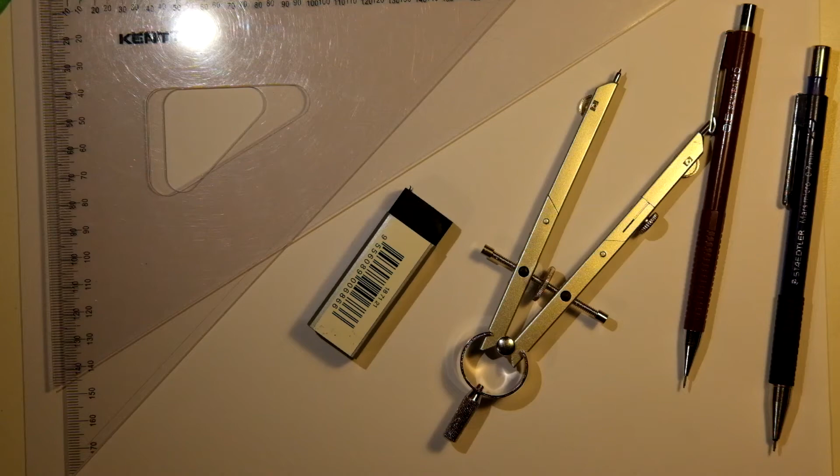This video is going to demonstrate how to produce a two-view sectioned orthographic drawing from an isometric starter. This is to simulate how a drawing might be in a HSC Engineering Studies exam.

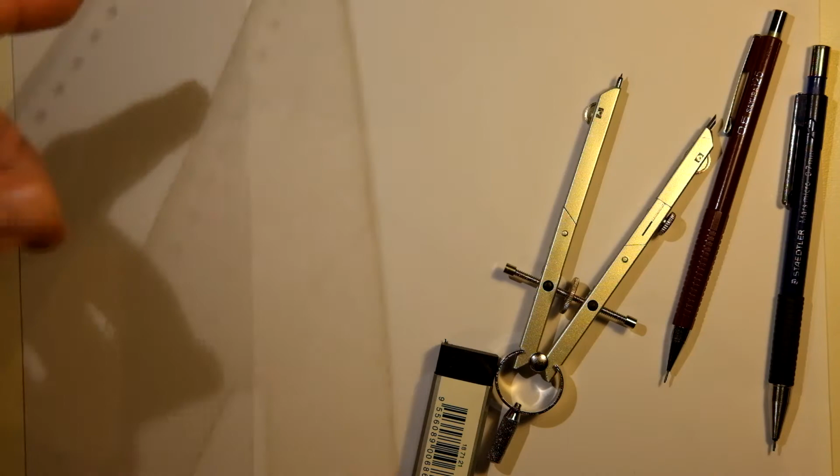Okay, the equipment I'm going to use: a couple of set squares, although for this drawing you could pretty much get away with just the 45-degree set square. I've got a couple of mechanical pencils, a 0.5 and a 0.7 millimeter, although you really only need the 0.5. Compass with a nice sharp lead and an eraser.

Alright, since we don't have a drawing board and T-square in the exam, I'm going to start by drawing myself a baseline that I'm going to use as a reference for all my horizontal and vertical lines in the drawing. That should be a nice light construction line. And I'll start by doing a vertical line at the right hand side of the page, which will be where I'm going to start drawing the front view of this object.

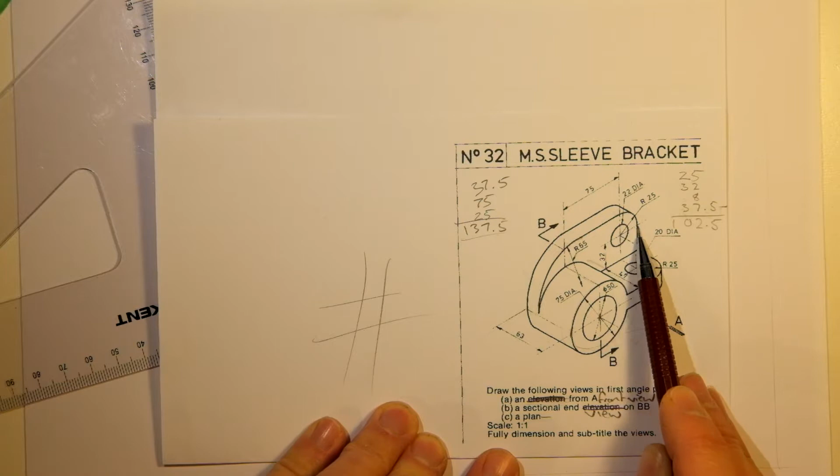Okay, so the task requires us to do the front view and a sectioned left end view. Let's work out the height and width of this object before we begin. So the width. Easily you can see the 75 millimeters here. You can see a 25 millimeter radius here, which means 25 from there to there. And we can see that this circular feature here is 75 millimeters in diameter, so that would be 37.5 millimeters from this center line. By the way, this center line continues through the center of the circle there. So 37.5 from there to the outer edge. So we've got our 37.5 plus the 75 plus the 25 gives us 137.5.

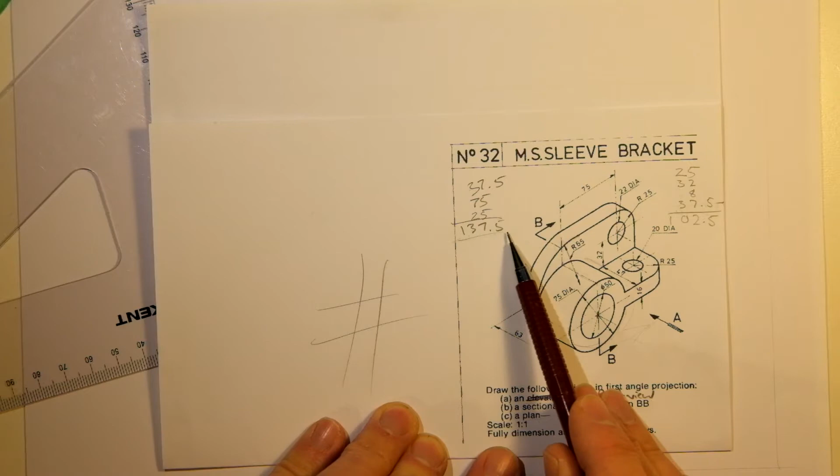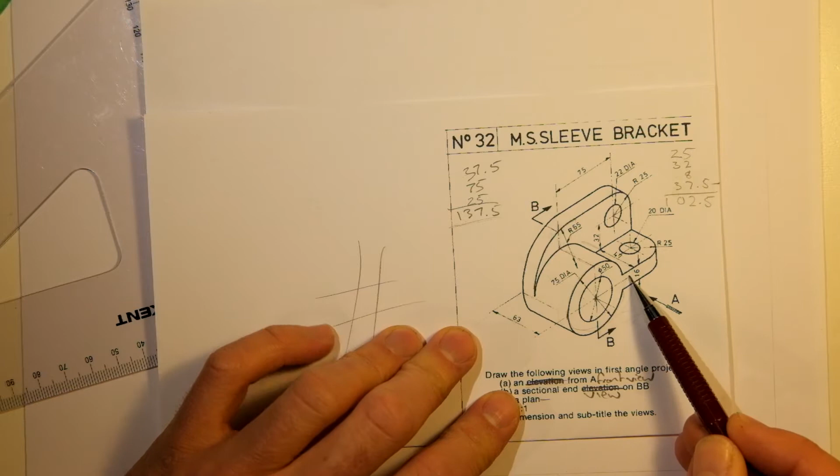So the height. We have this 25 millimeter radius, so from there to there is 25. From there to the top surface here you can see 32. This flange is 16 millimeters thick around that center line, so I'll add another 8 millimeters to that to bring us down to the center line. And then again we're going to use half of the diameter of this circular feature, 37.5 from there down to the bottom. 25, 32, 8 plus 37.5 gives us 102.5.

Right, so 137.5 I'm going to measure from that starting point on the right hand side. Place a mark on that measurement over here, and then use that to put in a vertical line. Now the height, 102.5. I'm going to measure that at 2 points up from the baseline, rather than relying on the 90 degrees from the set square, just to help reduce cumulative error a little bit. So I'm going to project that line all the way across the page because we'll need it over here when we do the left end view.

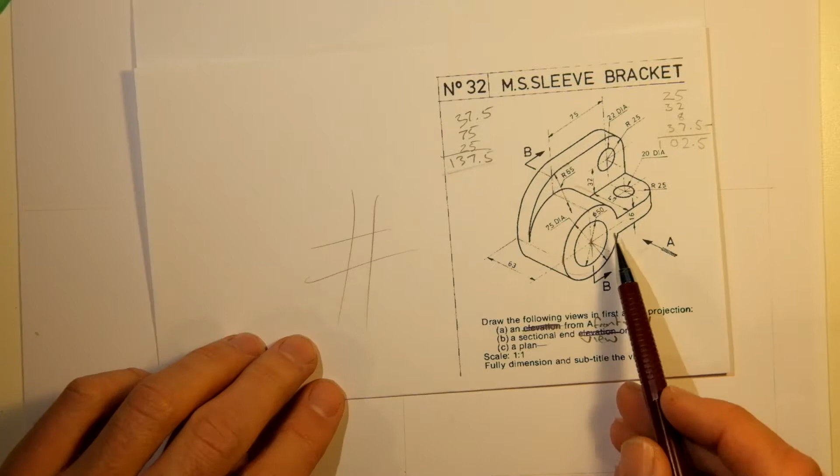Okay, so we're going to start by putting in this large circular feature here. It's a 75 millimeter diameter, so set your compass to half of that diameter, so that would be 37.5 millimeters. Got my compass set to the right size. So now to position the center of that circle, I'm going to take that radius and lay it out on the horizontal and the vertical sides of the rectangle. Then from those points, I'm going to scribe a couple of arcs vertically and horizontally. So that should give me the center of that circle. So now I'll draw that circle in. Just draw it in lightly for the moment because we might need to add something or change something.

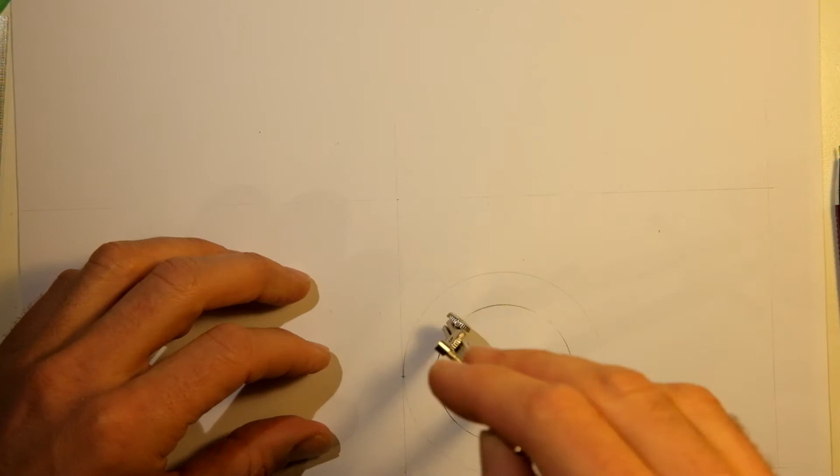Now the next circular feature here is 50 millimeters in diameter, so I will set my compass to 25 millimeter radius. Now this circle I'm going to draw in full weight right from the beginning because I can tell by looking at the drawing that I won't need to add or remove any sections of it. That circle is going to be a complete circle in the final view. Okay.

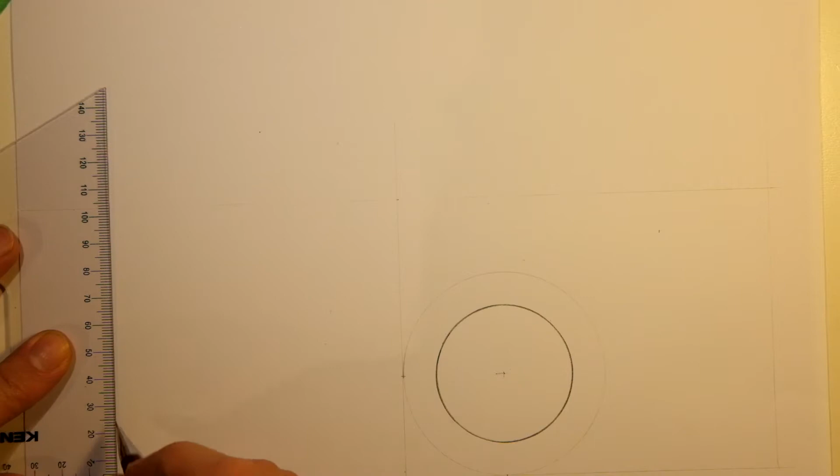So next thing I'll do, don't mind the baby noise, is a horizontal center line all the way through that part and all the way through the other view. So I'm going to again do a 37.5mm mark up from the baseline, and I will project that line right through. Now at some point this will have to be drawn as a dashed center line, but for now that'll do.

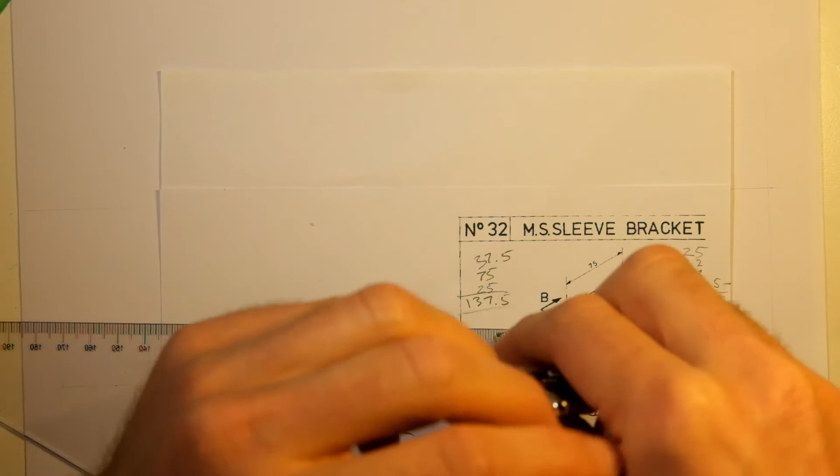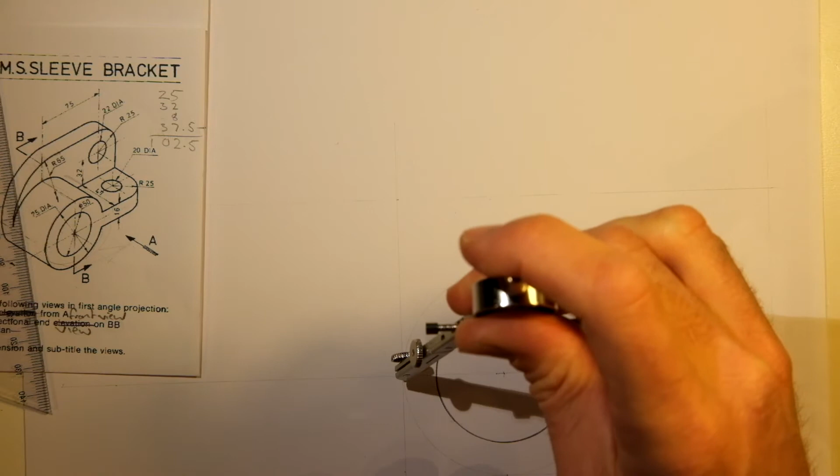Right, the next thing I'm going to draw in will be this arc here, this 65mm radius arc that's the top left corner of this part. So I'll set the compass to 65mm. Right. Now I can measure along this center line that I've just drawn, put a little mark there, and that is the starting point for that arc. And this is a way to check yourself, because the end of this arc should form a tangent to that top edge of the rectangle. If it doesn't, you've been inaccurate somewhere.

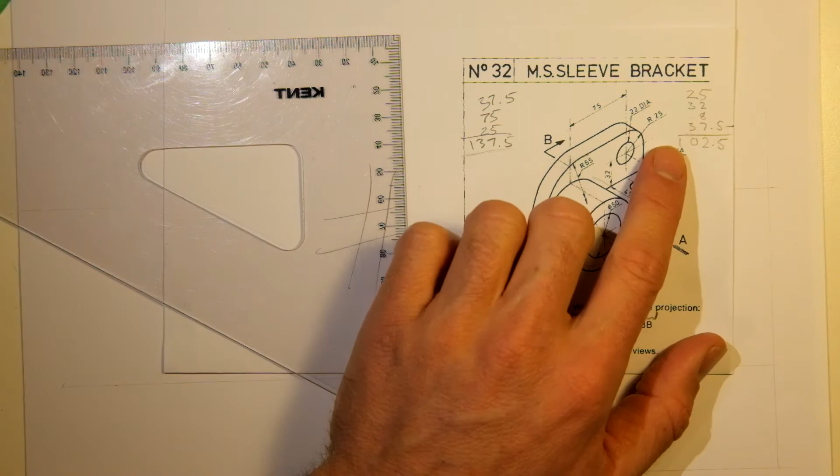Alright, so let's do the arc over in this top right hand corner now. As you can see, that's a 25mm radius, and conveniently that 25mm radius is concentric with this circle, which means once we locate the center of that, we've located that center for two features. So grab that 25mm radius.

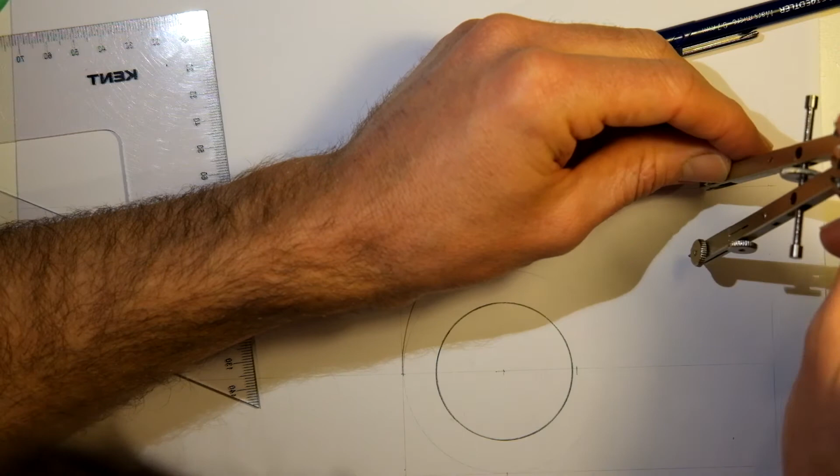And do the same thing again to find the center. I will make a little mark on the horizontal and vertical sides of the rectangle, and then from those points draw two new arcs, and at the point where those arcs intersect I will draw in the arc in the top corner.

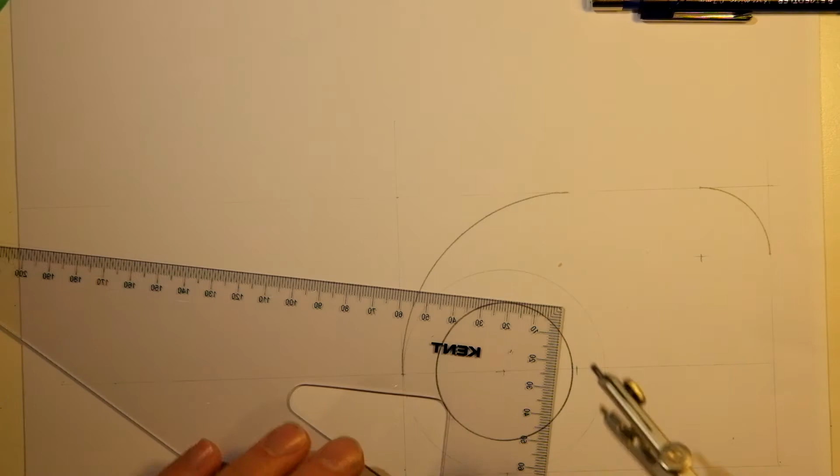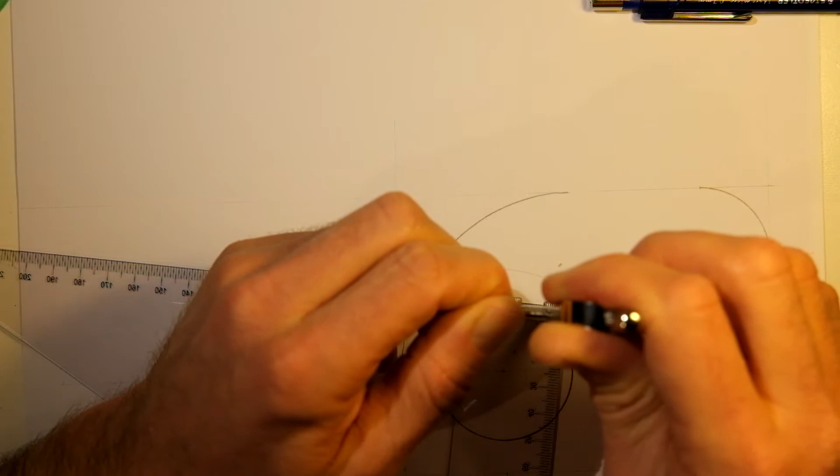While we're at it, I may as well draw the circle. It's a 22mm diameter. So I'll set the radius of my compass to 11mm. Draw that in. Okay.

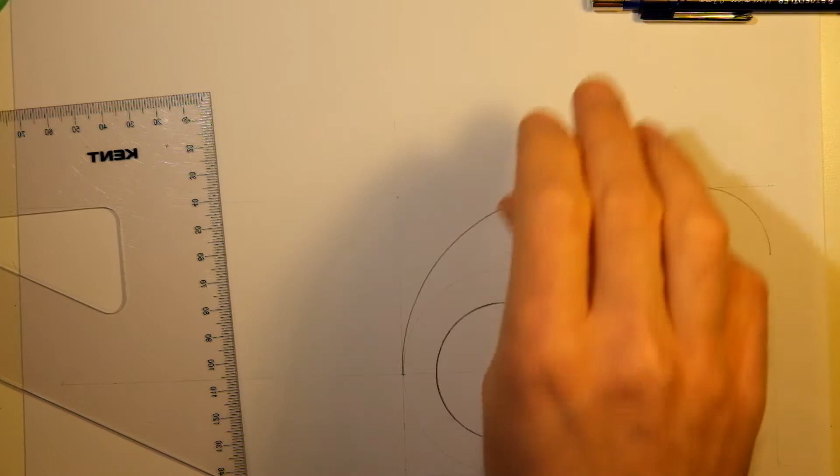Now we'll draw in the upper and lower surfaces, or the edges, of that horizontal flange. You can see it's 16mm high, so 8mm above and below that center line. And I'll do the same thing over the left hand side of the page, because we'll probably use that later. Light lines.

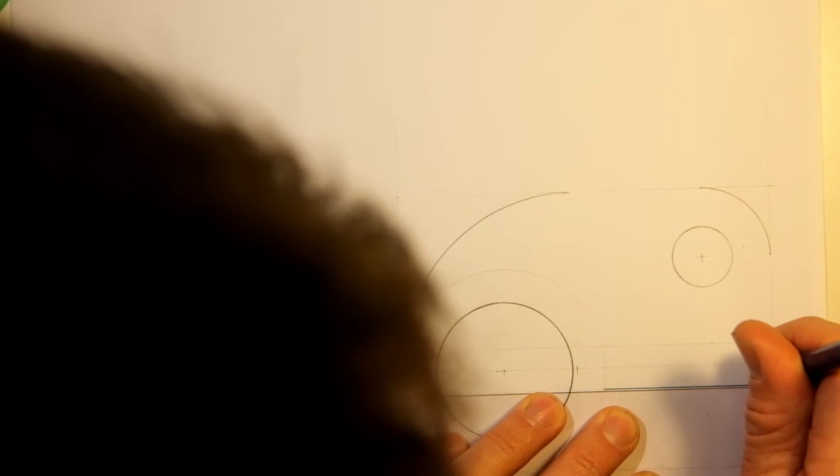Alright. So now we know that those will be full weight lines from the edge of that 75mm circle all the way across to the right hand side of the rectangle that we drew at the beginning. Now that's basically that view mostly complete. I'm just going to firm in a few of the remaining lines, darken them up a bit.

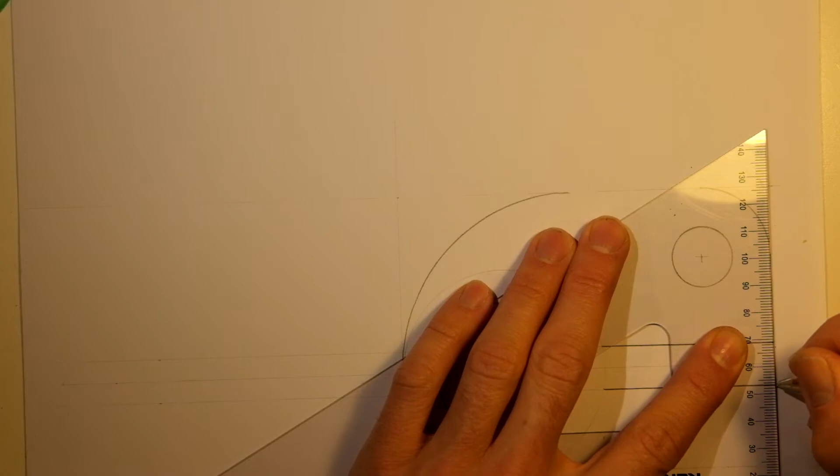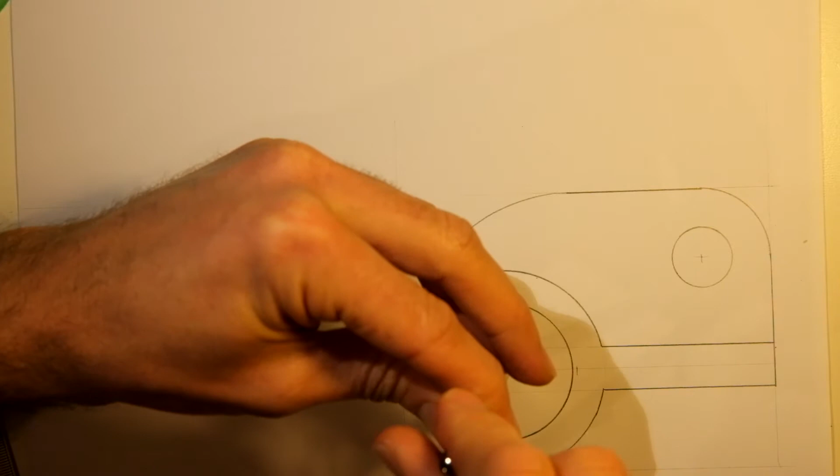Now I'll come back and finish off this 75mm circle. Now the only other things that we need to do on this view, we need to draw the hidden detail to represent this hole that goes through that part, or through that horizontal flange, and we can see that's a 20mm diameter, and conveniently its center is also 25mm from the edge.

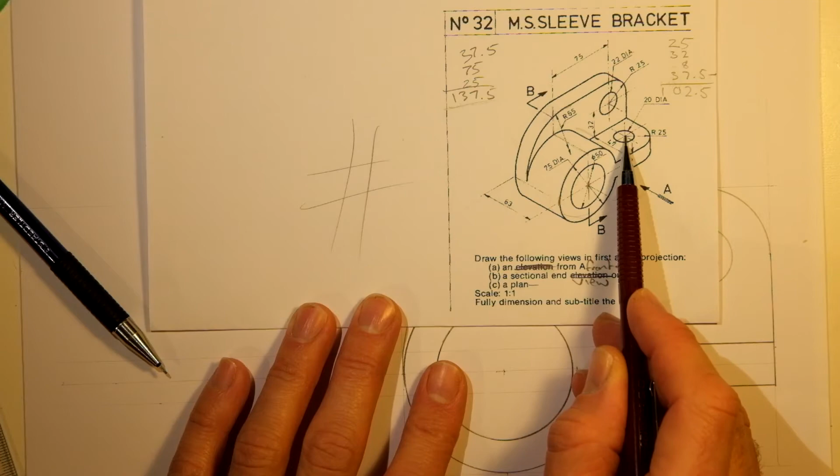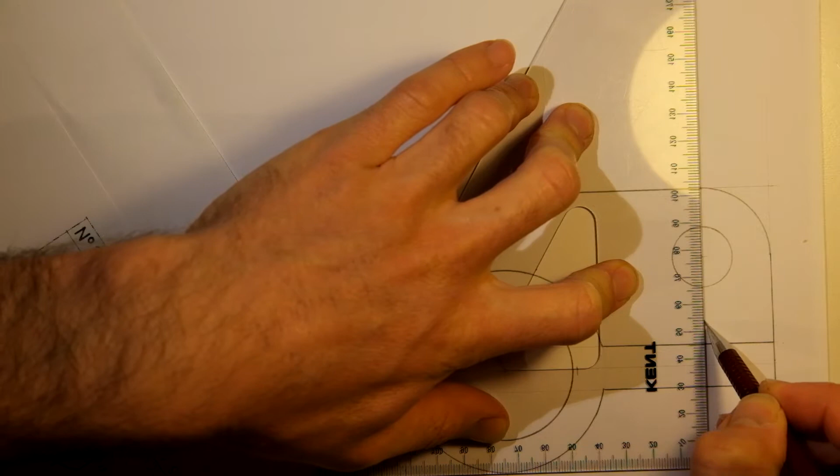So may as well draw a center line at the same time. So I'll strike a vertical line through the center of that circle that we drew before. May as well draw a proper dashed center line, long and short dashes through that circular part and continue it down to the bottom, through the flange, a little bit past, that'll do.

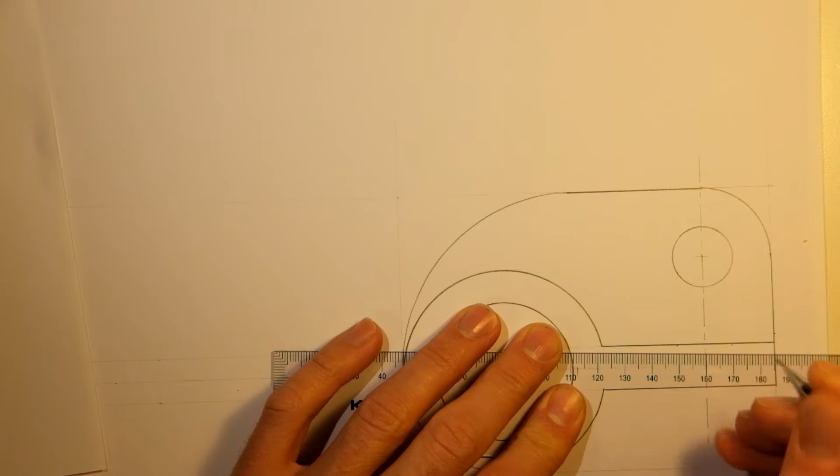Now, as we said, the hole was a 20mm diameter. So I'm just going to measure out 10mm either side, and then I can throw in those two little vertical lines. And remember, hidden detail lines are short dashes.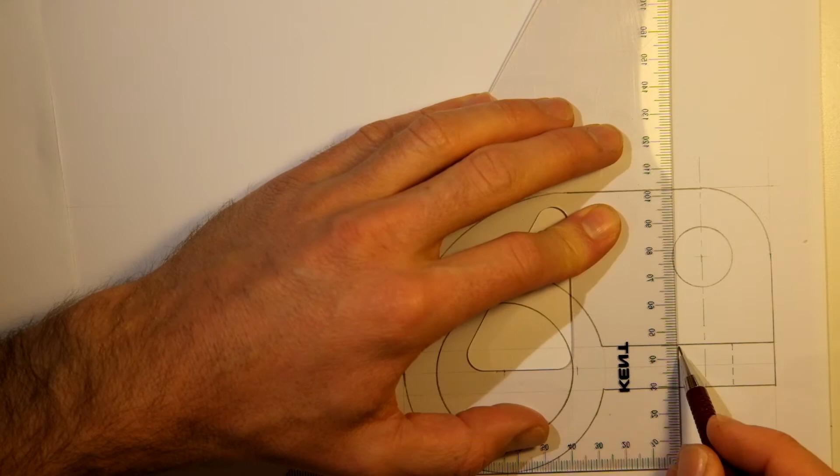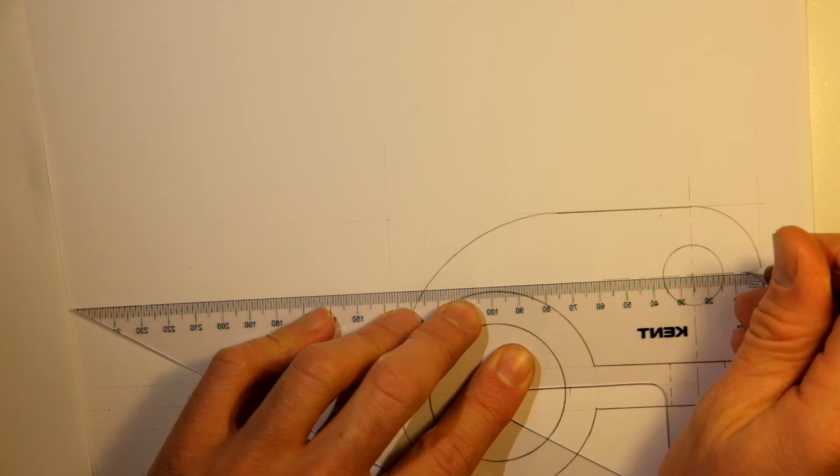Right, since we're in a center line kind of mood, I will put in a horizontal center line through this circle here. And through this circle. Alright, I'll leave that view as it is for now, and we'll start doing the left end view.

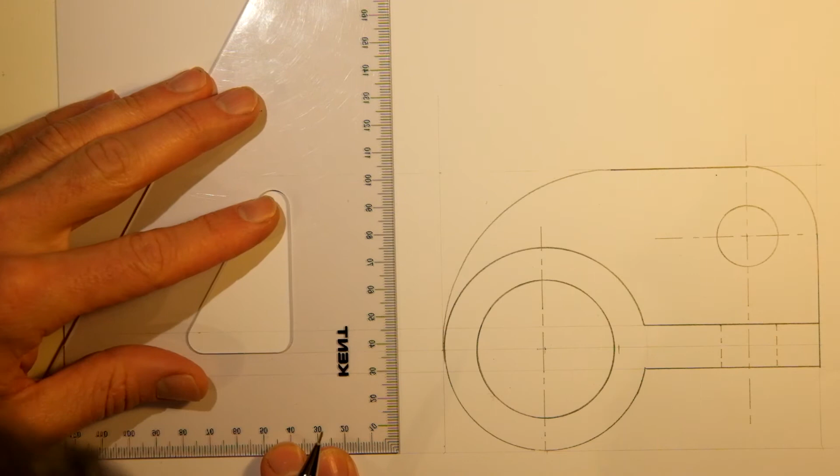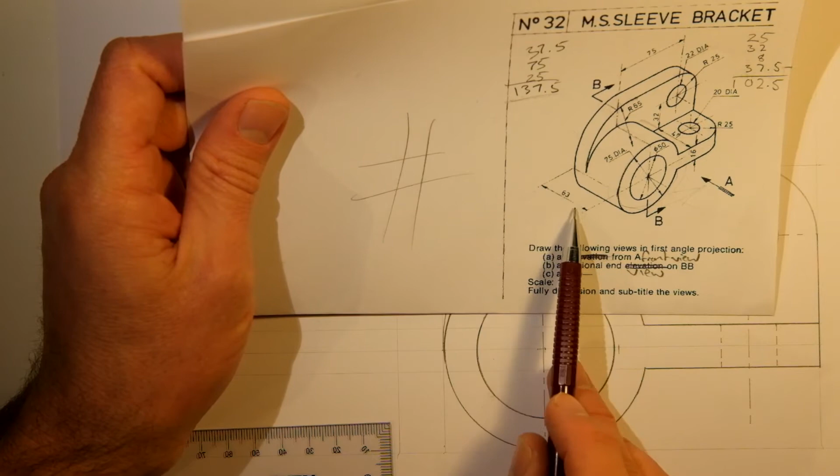Alright, continue with the left end view. Now I'll just come over some arbitrary distance between the views. Distance doesn't matter, I'm going about 15mm or so there. Now the width of this part, looking from the left end, was going to be, oh, we haven't worked that out yet. Let's have a look. It's 63mm, no calculation to be done. So at the 63mm mark, I'm just going to put a little mark and a vertical line.

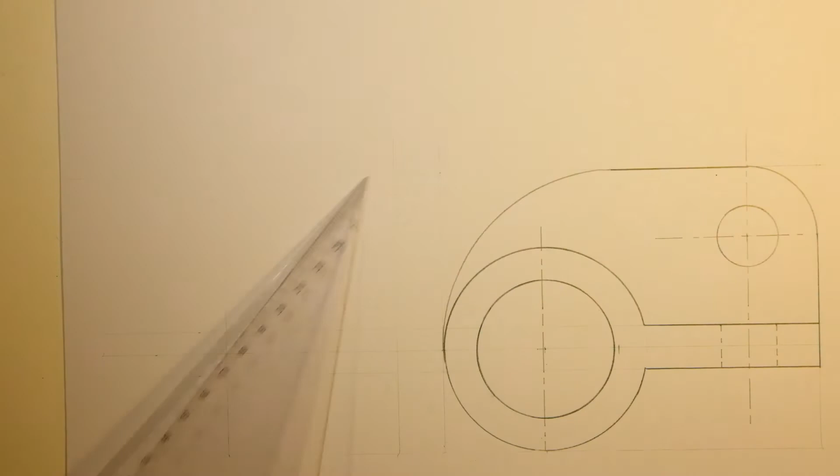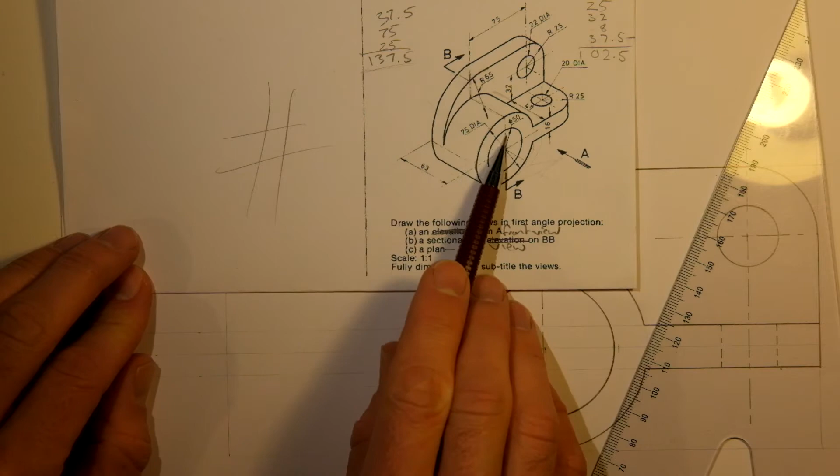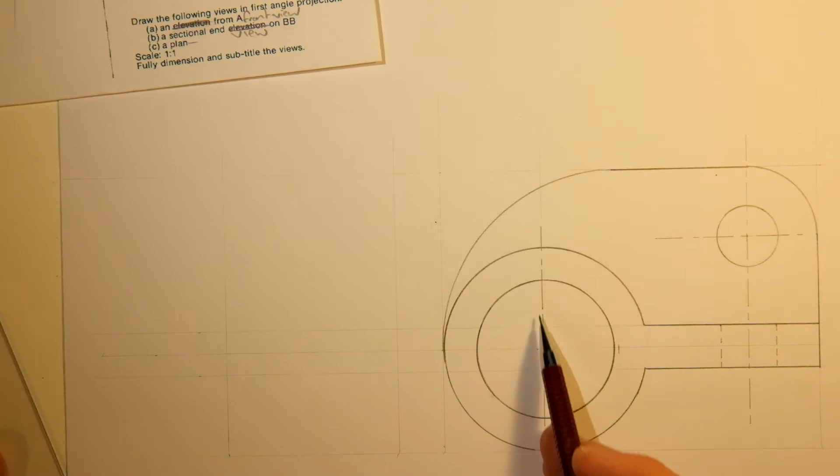Okay, so that rectangular box is going to be the confines, or the outer extents, of the left end view. Now, we're going to be looking at it in this direction here, and it's going to be sectioned along that line there, which is this plane here. Just to help us out, I'm going to project that center line right up there, because this point here is where the part is going to be sectioned. Probably not a bad time actually to draw in the section plane.

So just going to put a little mark in here and here.

Don't mind the baby noise.

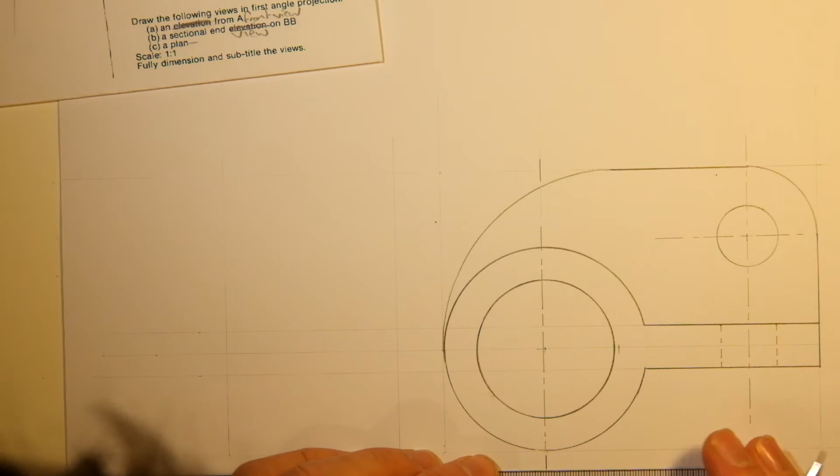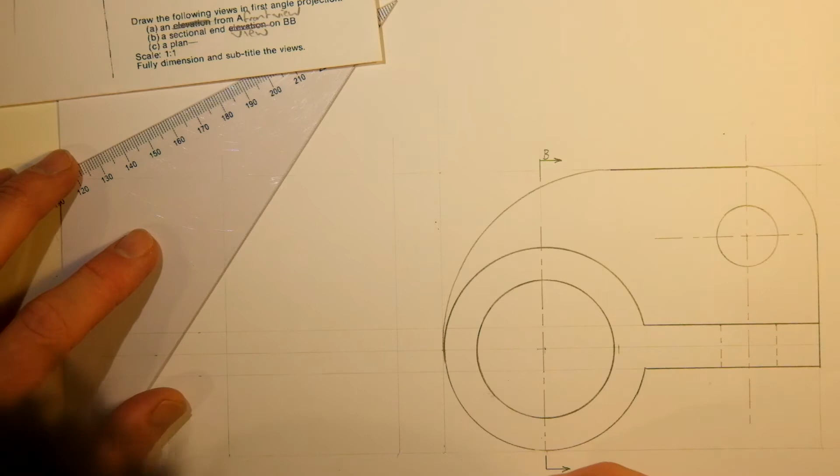Draw in a little horizontal leader here and here with some arrows, and I'll indicate that this is section plane B. That's where the section plane that is going to be visible in this view is taken from.

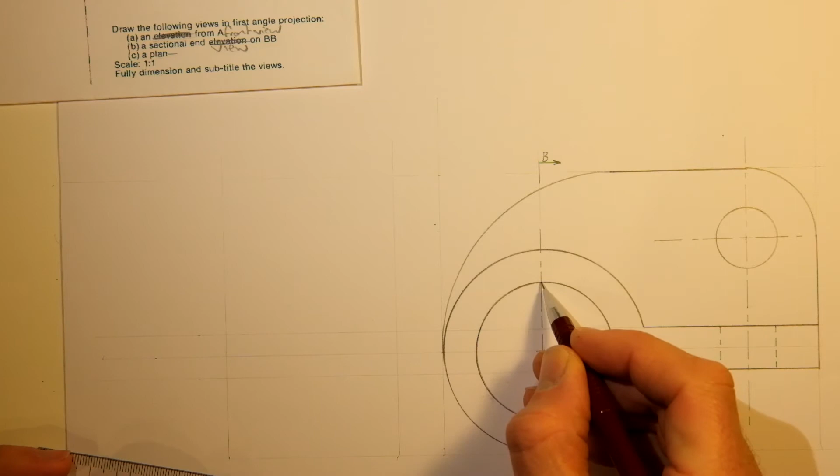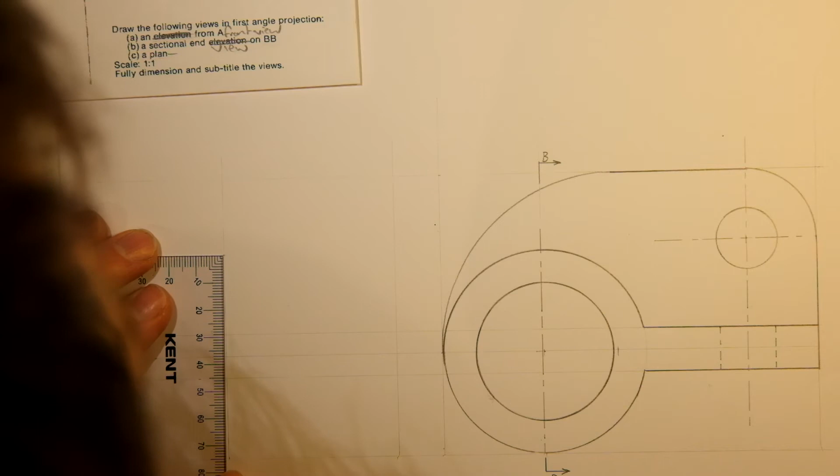Okay, so there's going to be a few details that we're going to have to project across from this front view, including the inside diameter of that bore and the outside diameter of that circular feature, a spigot you would call it. So that's 75 millimeters up. The difference in those radii should be 12.5 millimeters. I'll do the same thing top and bottom. Now I can draw in these lines.

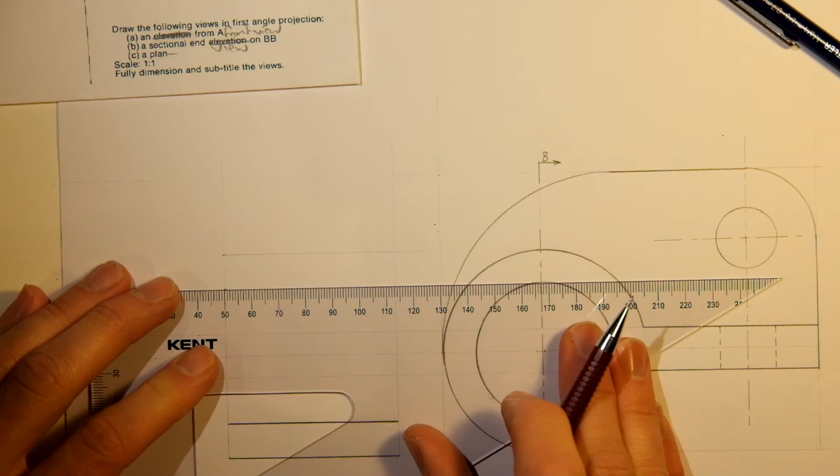Now I'm going to go ahead and firm this line in here right from the outset, because I can tell that it goes the full width of the part, as does this bottom line here. Okay, another couple of lines I'll project across now. Here and here, so just to clarify, these lines are meeting where those circular features are there on that center line.

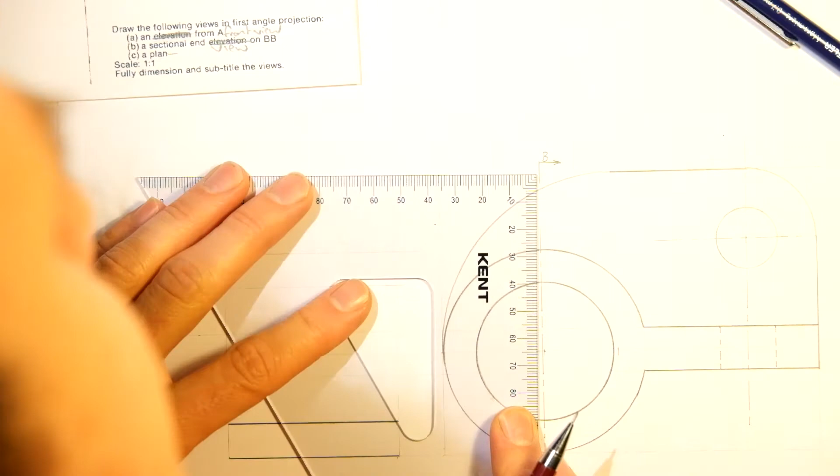The next one I'm going to project across is where this 65 millimeter radius arc intersects with that section plane. So I'm going to measure the distance that it is down from the top, about 6-ish millimeters. Throw that in here, and now I can project across. See, I have that point there lined up. Alright.

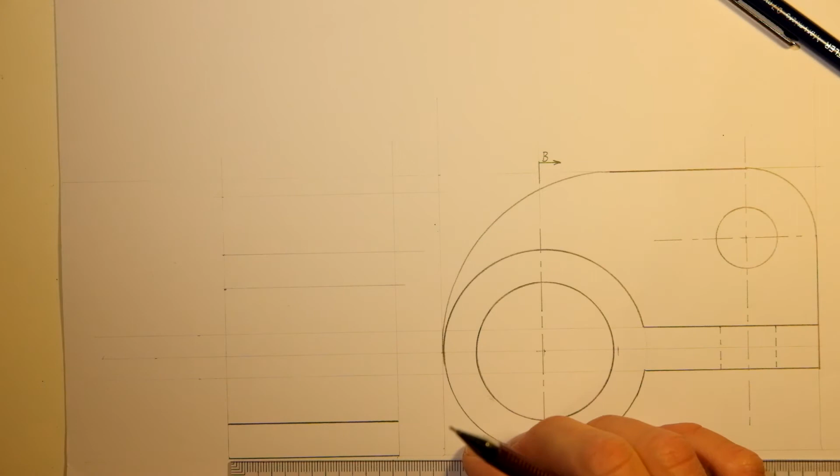The other detail we need to have shown is the width of that vertical flange there. And is there any way to work that out? We have the 63 millimeter width here, and we know that this is 47 millimeters, so the remaining width there is 63 minus 47, which is 16 millimeters. So I'll measure across 16 millimeters here.

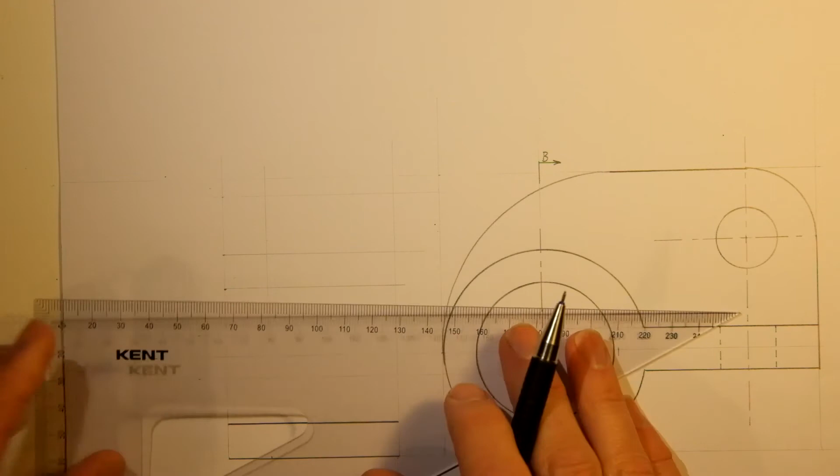And I'll throw in that vertical line there. Okay, now we should be able to firm in most of these details. Hopefully this will make what I've been doing a little bit more clear.

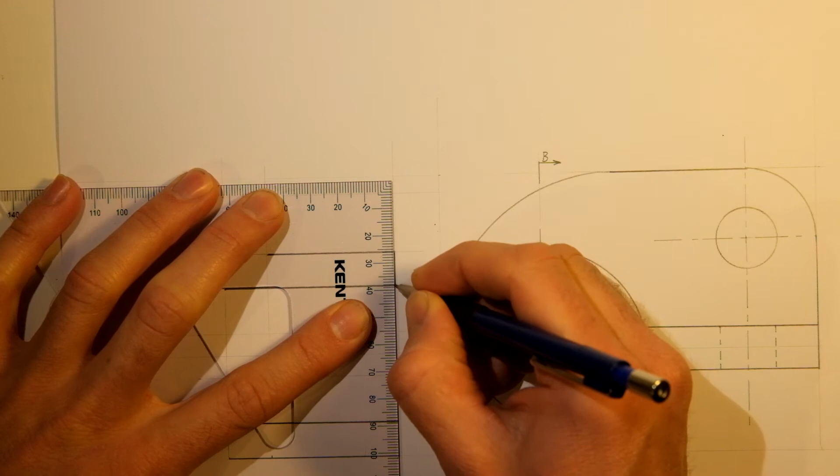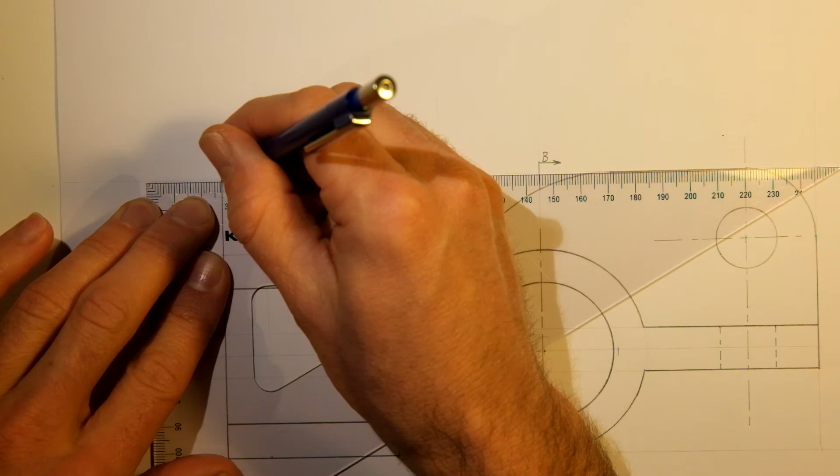Now, it's helpful when you're doing things like this to make sure your eyes are directly above where your pencil is, or especially when you're measuring things, have your eyes directly above your set square. I'm trying to avoid doing that now so the back of my head doesn't fill up the frame of the camera. But it really helps your precision if you keep your eyes above where you're drawing in the exam.

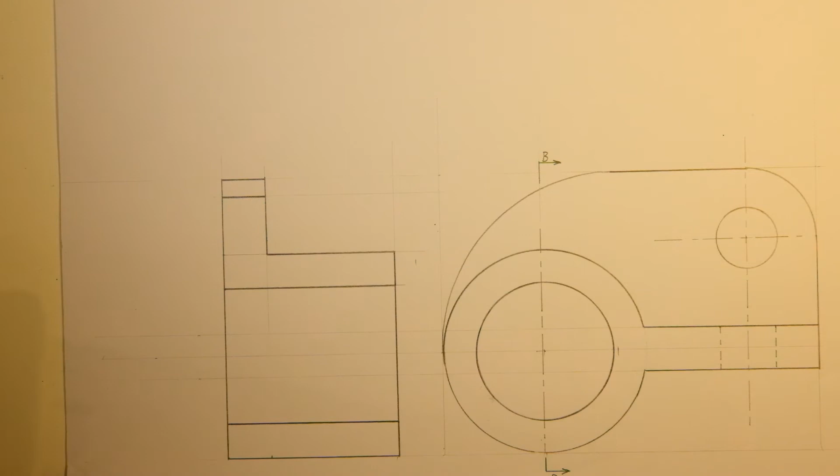And I've made a little mistake here. I should have drawn this as one continuous line all the way through. Okay, so what I'll do now is go and draw some of the sectioning lines. So the surfaces that have been sectioned are this area here and this area here, which is the equivalent of the bottom half and the top half of that spigot, and then this section of this vertical flange.

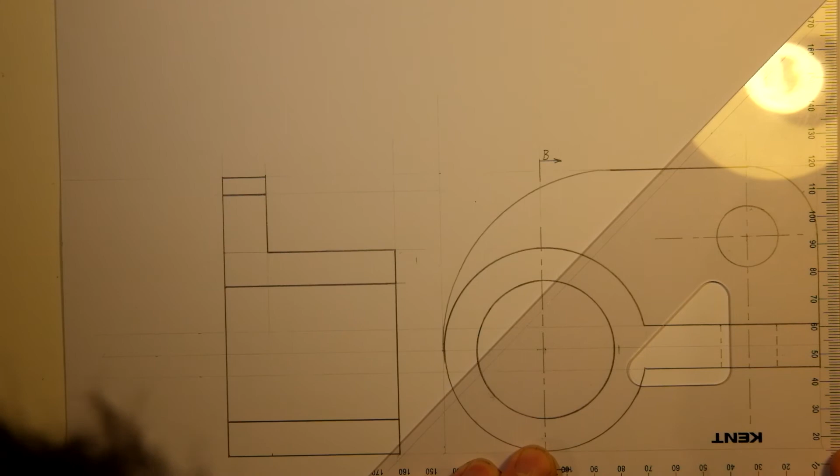Now to do that, I've got a 45 degree set square, and I actually have a line scribed in from the edge, a short distance, 4 millimeters from the edge of that set square. I think technically section lines should be a bit closer than that, but having them 4 millimeters apart speeds up the process. You don't end up doing so many of them.

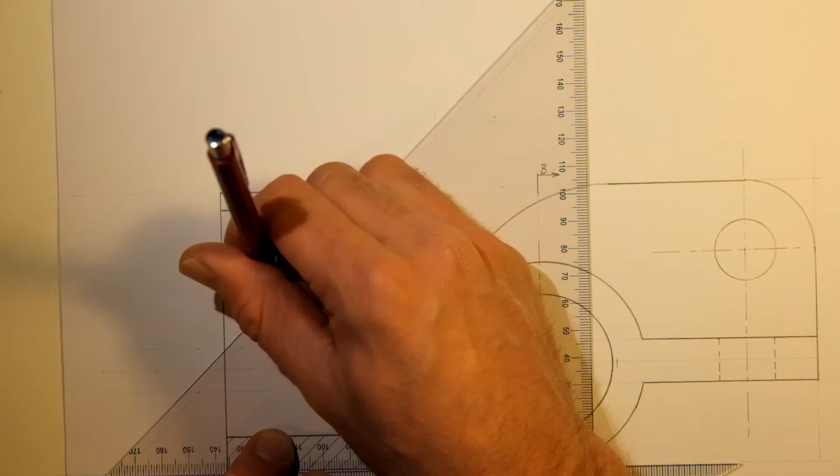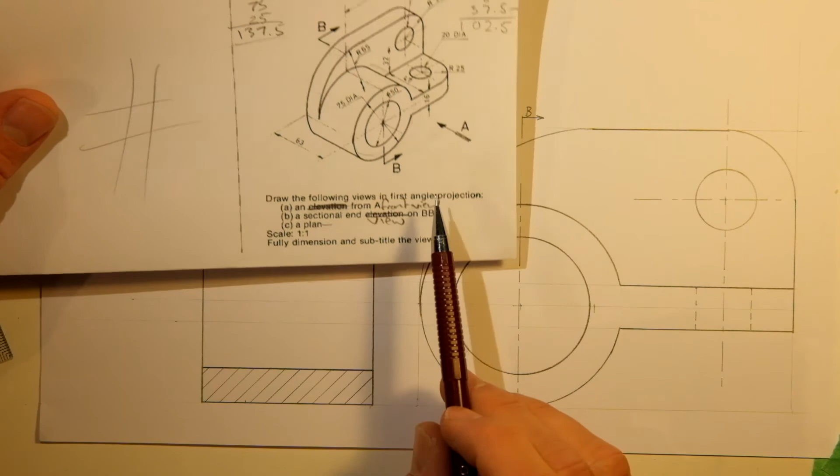Right, that's the cross-hatching for the sectioning done, and there's just a few more details we have to add to this view. So we have to show the hidden detail that represents what we would see looking at the inside surface of this bore from the things that are behind it. So that would be the upper and lower surface of this flange and the edges of this hole.

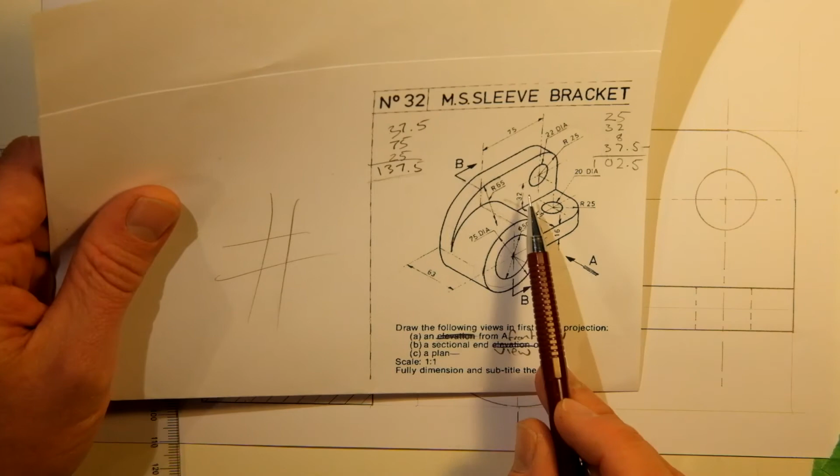So let's also do a segment of this vertical flange that you would see looking through that object. So it's pretty easy to do using the lines we've already drawn. Got some hidden detail here. Remember, hidden detail lines are short dashed lines.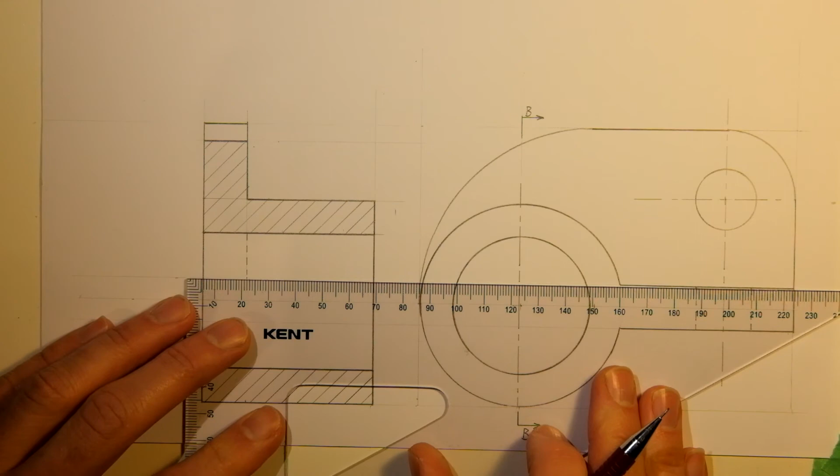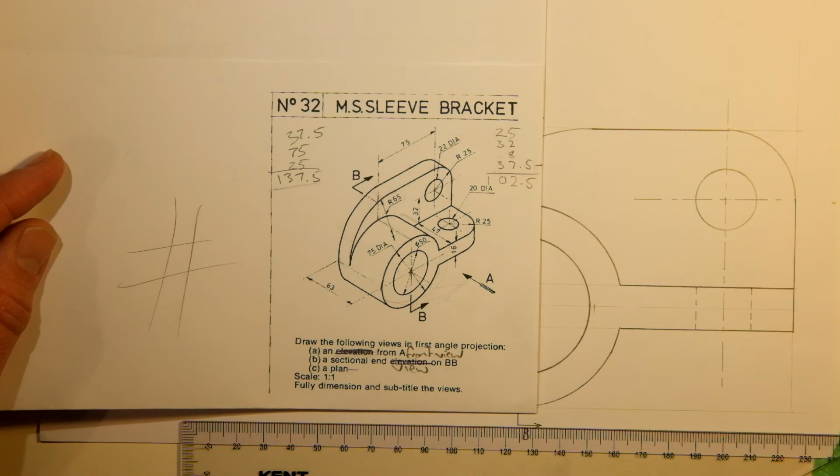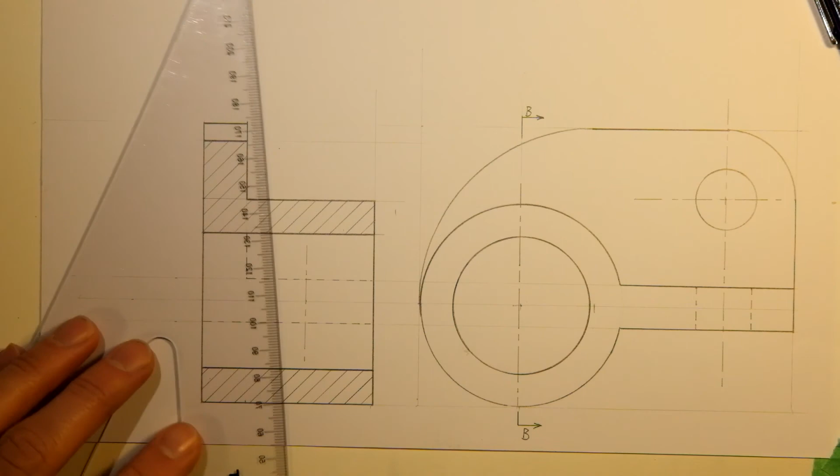Right, let's just work out the positioning of this hole. We can see that it is 25 millimeters from that outer edge, as shown by the fact that radius there is 25 millimeters, and it is a 20 millimeter diameter hole. So to find its center, I'll just come in 25 millimeters from that edge, put a mark, and I will drop in a center line through that mark. Long short dashes, and we can just measure out 10 millimeters either side and drop those hidden detail lines in.

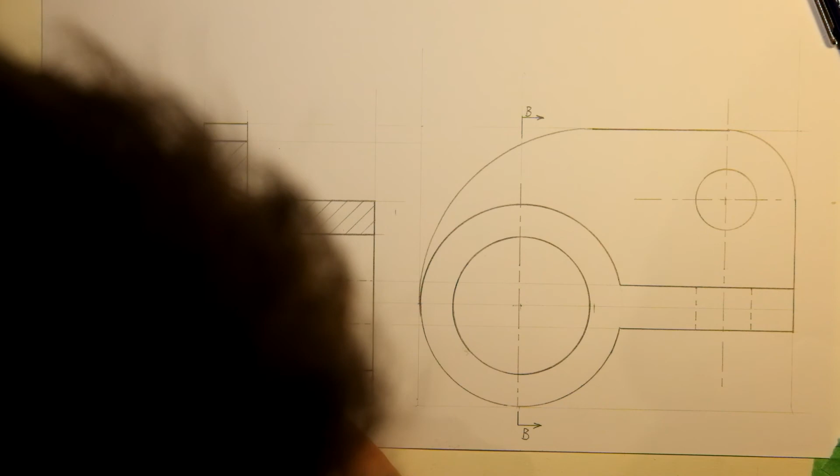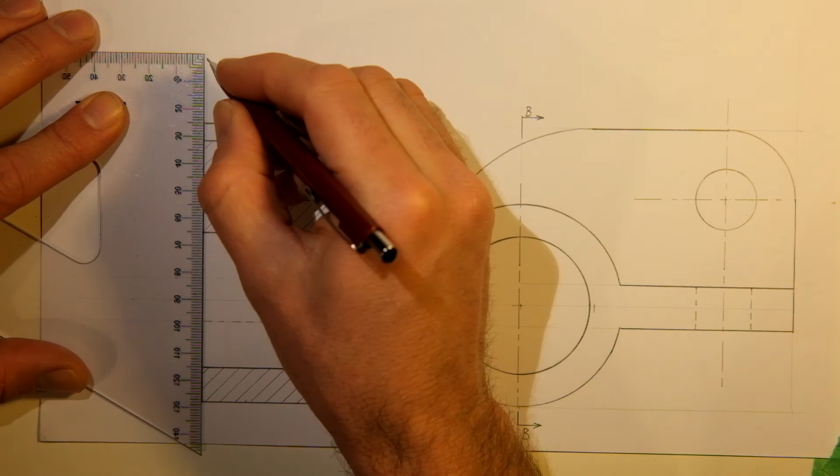Alright, so that's all the hidden detail finished there. So the only things to do now are to throw in a few dimensions, and then we're basically done. So let's just do one of each of the common types of dimension, to prove that we can. The HSC exams will often tell you exactly what they want, and usually the goal is to show that you know how to produce dimensions.

Our little dimension lines there. Remember, the dimension lines are medium weight. They don't touch the part. There's usually about a 1 or 2 millimeter gap. Your little arrowheads, and your dimension itself should be written so that it sits on top of that dimension line, not underneath it. So there's a horizontal dimension.

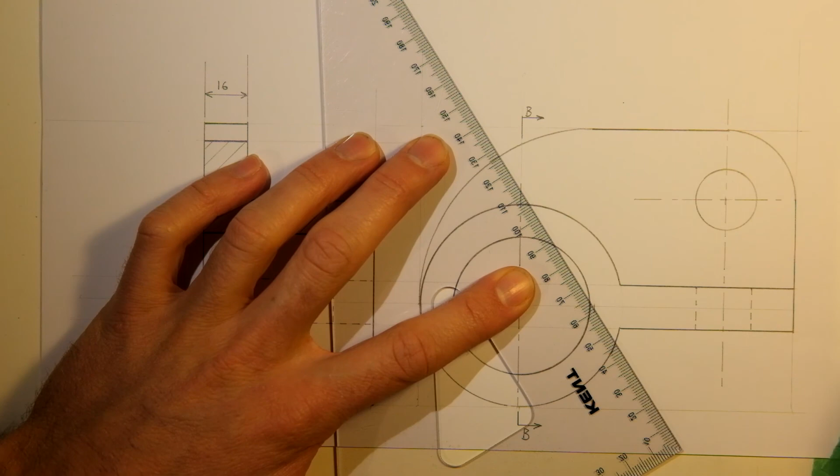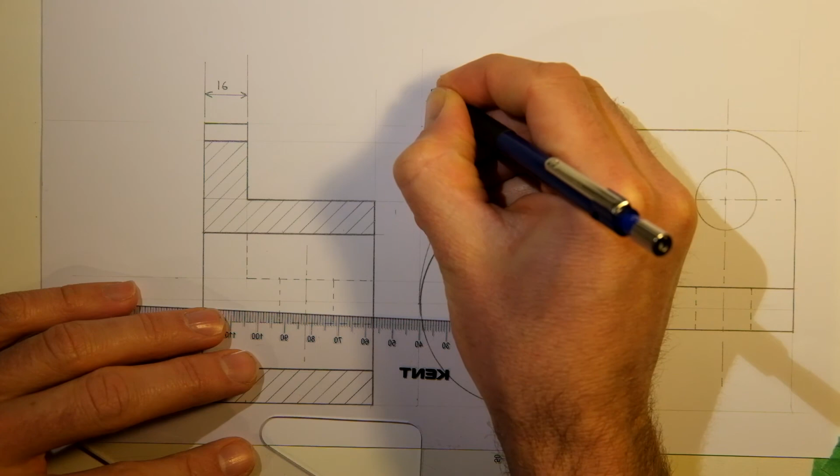Let's do a radius now. So let's do this 65 millimeter radius. So from the center point where we originally drew it, I will put in our dimension line, do our arrowhead, do our leader. The leader is meant to be a horizontal line, and we'll write in the actual distance. Quality of your lettering should be a bit better than that if you can. Alright, so that's that radius drawn in.

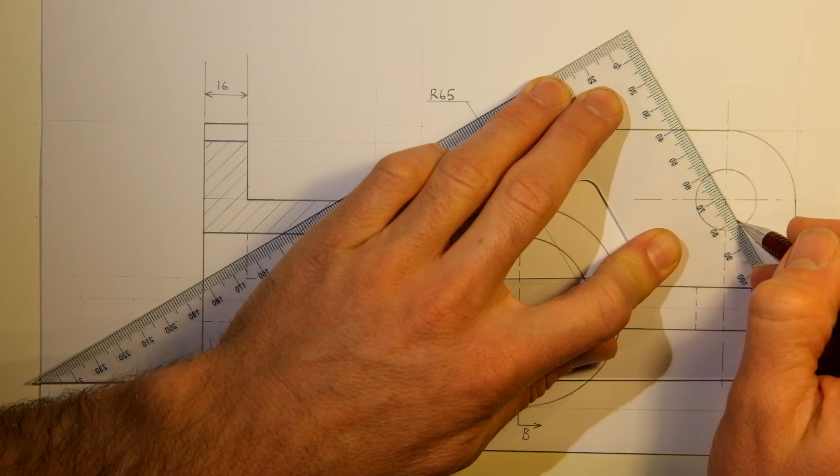Let's do a diameter now. It's pretty much the same process. Remember your arrowheads. We'll do a horizontal line for the leader. And then we'll write in the diameter of this feature. In this case, it is 22 millimeters.

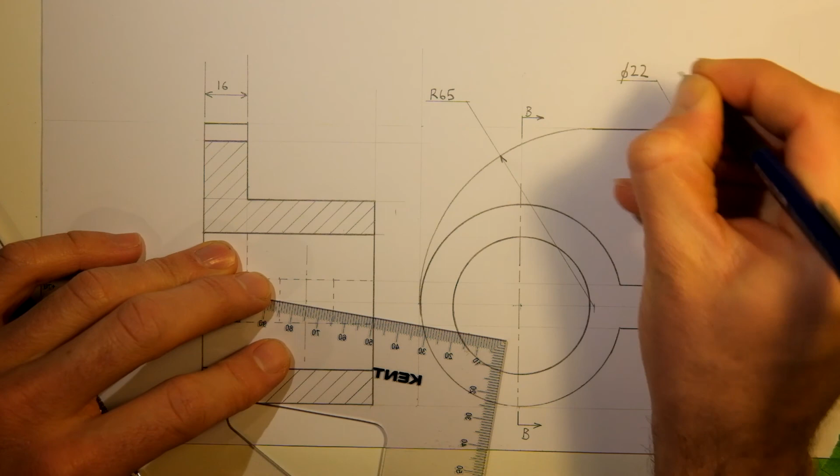Alright, and draw a vertical dimension in. Now, a bit awkward doing this on the left-hand end of the object, but if I try to do it on the right-hand side, I will knock over my camera tripod. Anyway.

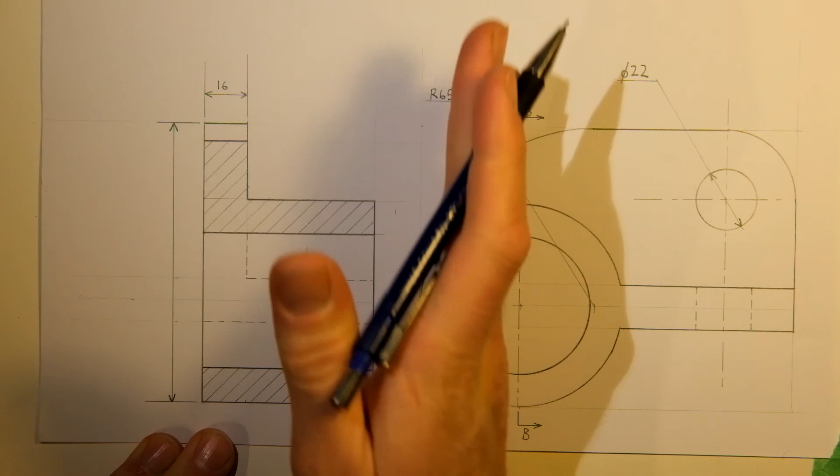Dimensions should be drawn so that they're read in the horizontal position or by turning to the right. When you're doing this, turn your page around so you can write upright, don't turn your body around like I just did, and you'll get better quality lettering.

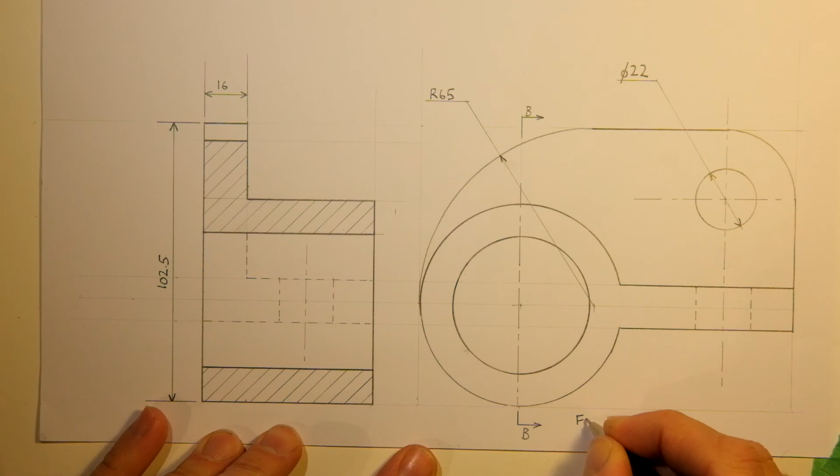The last thing to do would be to label the views. So you should draw yourself some guidelines for your lettering that would be normally about 4 millimeters apart. Your lettering should be capitals. Now this one is a sectioned left end view BB.

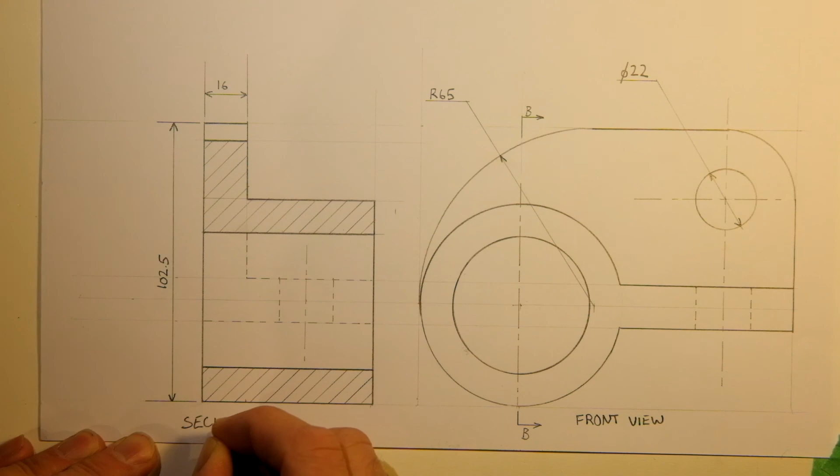Now anyone who knows anything about technical drawing will be screaming that I haven't got a border or a title block here, but fortunately this is just for a HSC exam where we don't care about things like that. But that is that drawing basically complete.